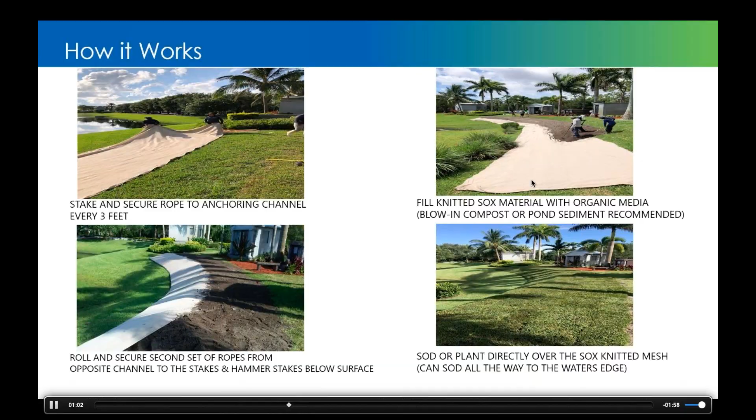As you can see in the photos, the resulting stability that SOX provides gives root systems and vegetation the ability to establish and take hold. The advantage of our systems is the speed of deployment and the complete stability for thriving vegetation, as well as water filtration, reducing nutrient loading in the adjacent water bodies.

Systems can be deployed in either a single layer yielding a specific grade or in a multi-tiered stacked array depending on the needs of the client. Our systems are filled with organic material, either dredged from the adjacent water body, hauled in from an outside source of earthen material, or blown in using a mulch or blowing compost truck.

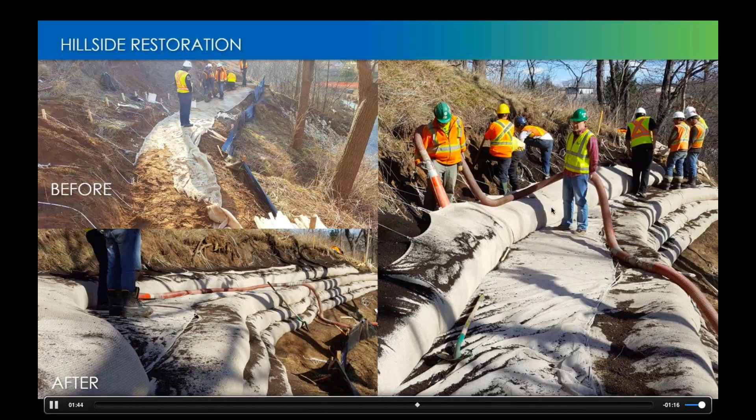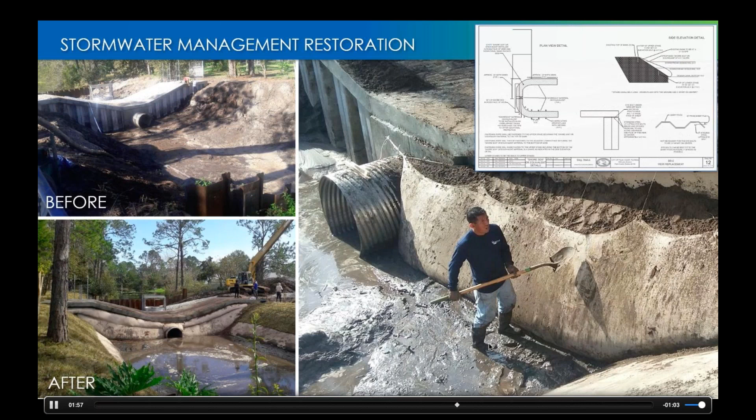We manufacture our systems in 6, 12, and 18-foot sections, but the modularity gives us a lot of flexibility for in-field modification. It is said that a picture tells 1,000 words, and I can stare at these and listen to their message for hours. Municipal, private, public, federal government, FEMA, individual homeowners, golf courses, HOAs, oil and gas, and energy are just a few examples of the client channels that we provide solutions to.

This series of photos shows the flexibility and durability of our system, going from a 4-1 grade to a shear wall to protect this large outflow culvert serving as the primary outflow for a 25-acre big box retail site in Augusta, Georgia. Mitigating sediment migration as well as improved water quality and mosquito control were the primary goals and achievements of this project.

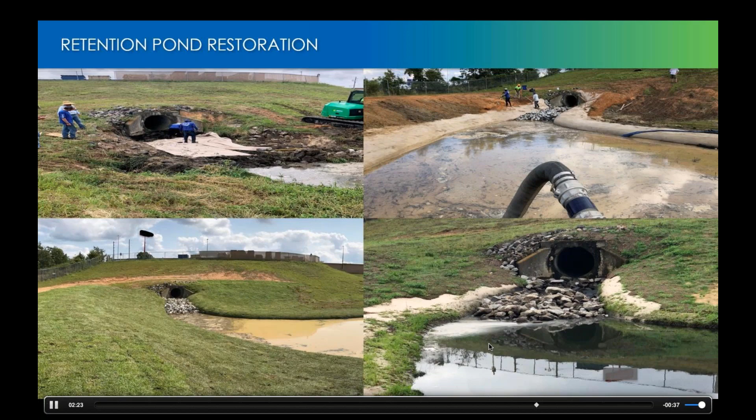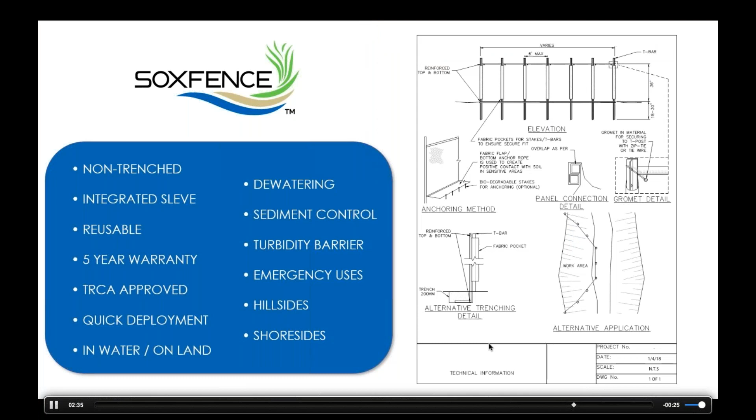SOX Fence is an ultra-high performing silt and sediment barrier currently being used by municipalities in California to mitigate the risks related to mud and landslides. Unlike other silt fencing, SOX fence is non-trenched and has a 5-year warranty.

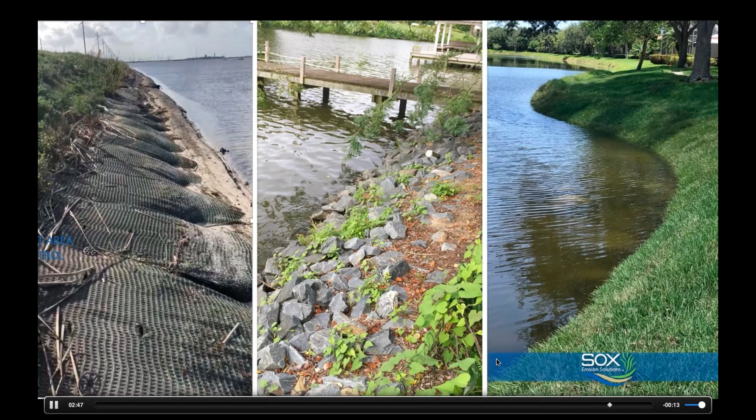All erosion control systems serve a purpose if they are properly spec'd, but as you can see on the right side of this slide, SOX is bioengineered, long-lasting, and meets all BMPs for living shoreline erosion control. Thank you so much for your time and attention and for caring about the stability of our environment.

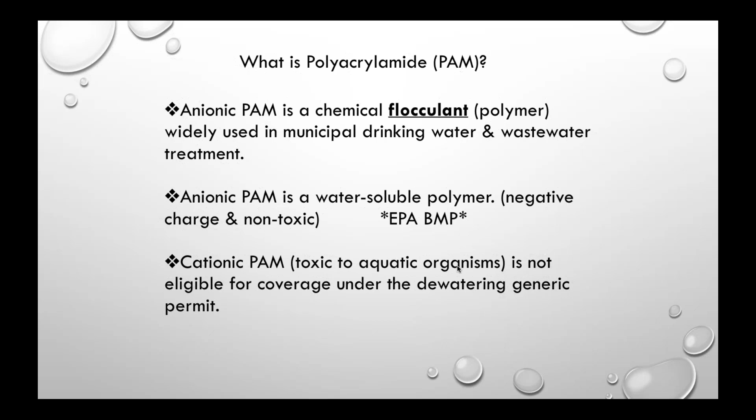As I mentioned at the start, our products are used to achieve two things: sediment control and water clarification. Our H30 granular line can be used in a variety of applications, including demucking sediment basins, under erosion control blankets or on wattles, for dust control, and especially as a superior tackifier. Our H30 liquid line also can be used for dust suppression and as a tackifier.

The Flock product suite is a suite of semi-hydrated anionic PAM blended forms used to clarify turbid runoff. When the runoff flows over the product, it starts to dissolve and begins the flocculation process within the water column. Over a short period of time, the sediment will start to drop out of the water column, allowing you to discharge clean water from your site.

There are two ways to treat the runoff with our products. The first is to actively pump the water over the products, and the second is to passively treat the water by staging the products in the concentrated flow. Next slide, please.

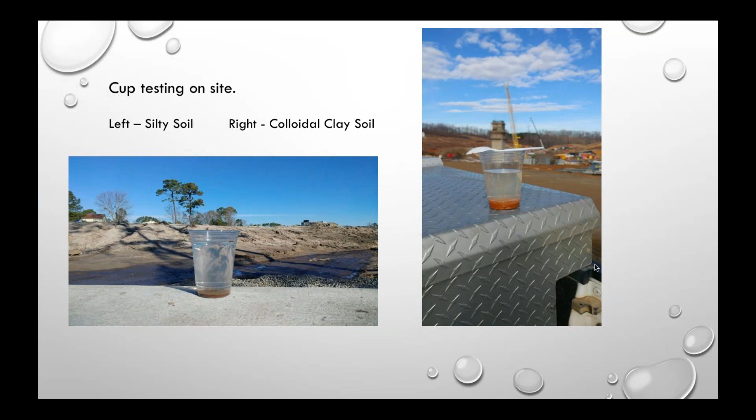We're an 800,000 square foot manufacturing space. We focus a lot on quality, making sure products are durable, withstanding the needs and environments they're placed in for each project. We've been manufacturing these materials, specifically our erosion control products, for over 30 years with over 40 million square yards of successfully installed products. We've been doing this a long time and have a lot of good experience, whether it's with the Army Corps or with other engineering firms, to work through the design process and installation of these materials.

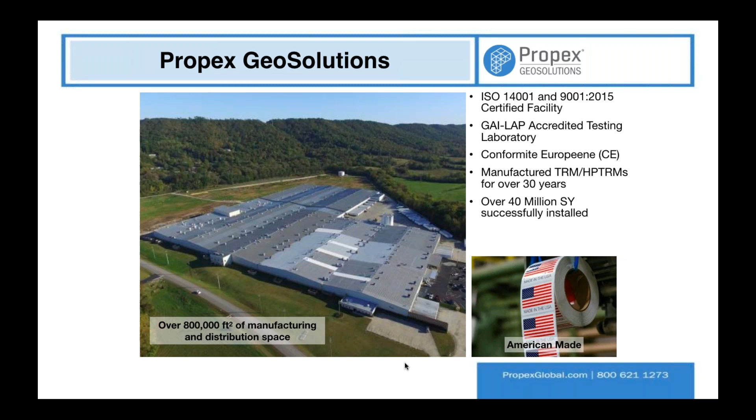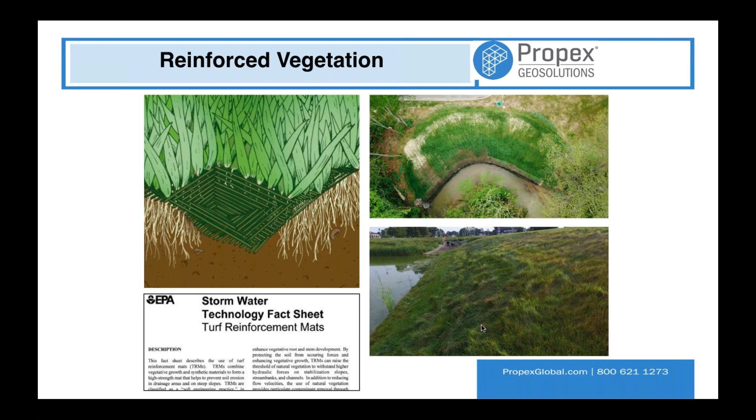Most everything we do from the erosion control side is focused on the idea of reinforced vegetation. Vegetation itself is a great best management practice, a great way to control erosion and improve water quality, but there's a hydraulic limitation of that vegetation by itself. So we look to reinforce that vegetation with turf reinforcement mats or high performance turf reinforcement mats to increase the hydraulic performance of the system as a whole. We've worked with the EPA in the past and established that these materials are best management practices in using vegetation in a higher capacity hydraulically, and also getting a large benefit from the environmental perspective as well. Next, please.

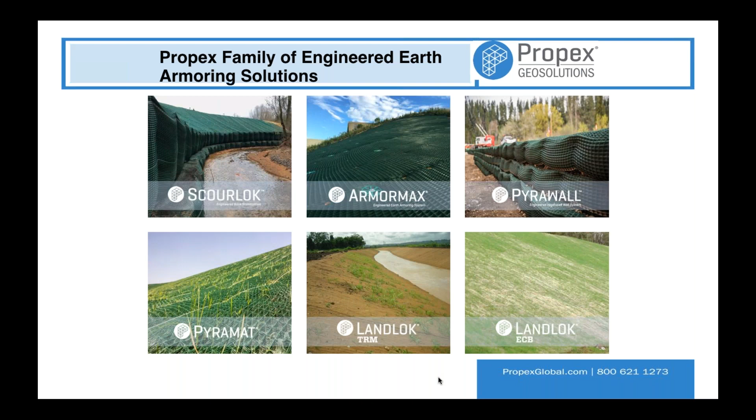As I mentioned, we are a manufacturer, but we very much focus on the engineering support portion of this. I'm an engineer myself. We have a team of engineers in our engineering services department, as well as engineers in our market development out in the field. What we try to do is provide that service to understand what the problem is for the project, work with the engineer, contractor, or owner to determine the best solution overall, whether it's partly Propex or partly other materials, a combined system. If you have any questions, we're here to support you, whether it's a geotechnical analysis, a hydraulic analysis, or just general support on installation. So thank you very much, and our contact info is there as well.

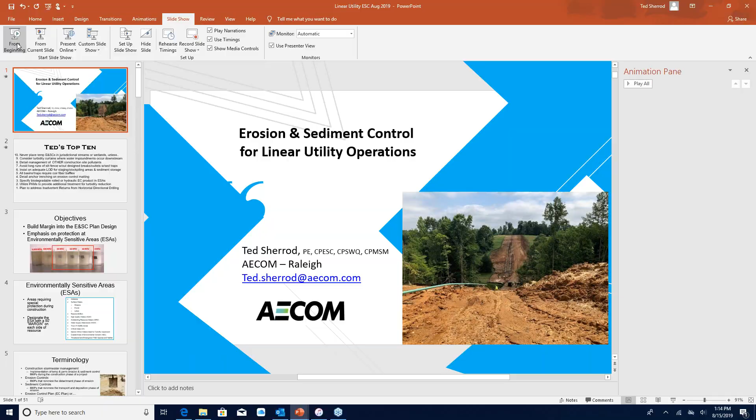Okay Ted, it should be all yours. Great, okay. Well, good afternoon, everyone. I'm Ted Sherrod, and we want to thank the sponsors today for presenting some information. I will specifically be reviewing some of the erosion and sediment control considerations for linear utility operations.

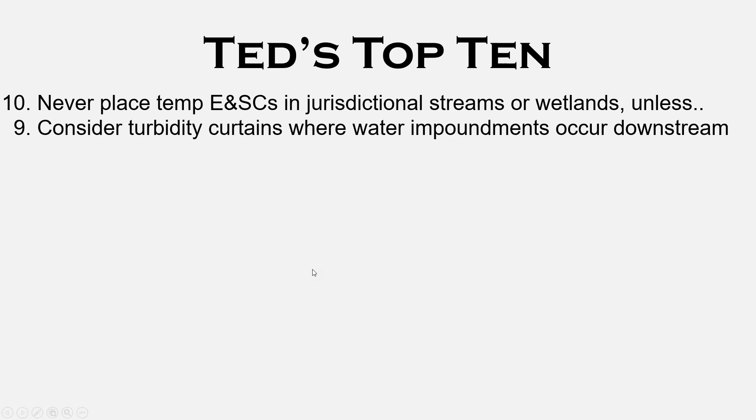I'd like to start with Ted's top 10 for you today when we talk about implementation. Stay out of those jurisdictional areas unless we're permitted to do so. How about turbidity curtains, where we have downstream water impoundments? Those are some additional components I'll touch on today in and around our linear utility jobs. Not only erosion and sediment control, but are we targeting those other construction site pollutants? How are we handling our concrete waste or other petroleum products on our job site and preserving water quality? Avoid these long runs of silt fence without designated outlets. We need those J hooks — I see a lot of that on our linear projects. How can we address appropriate control there?

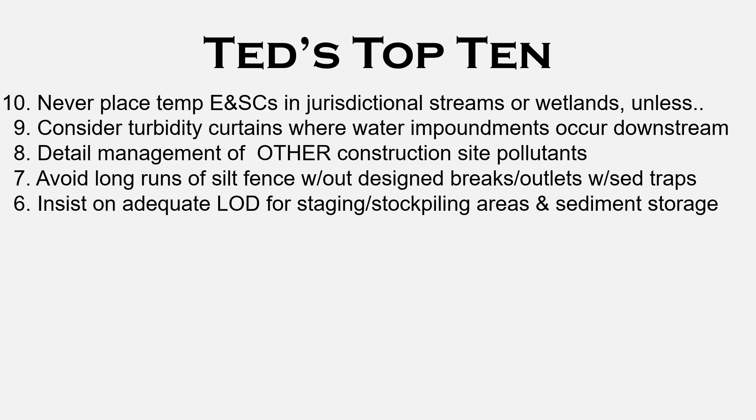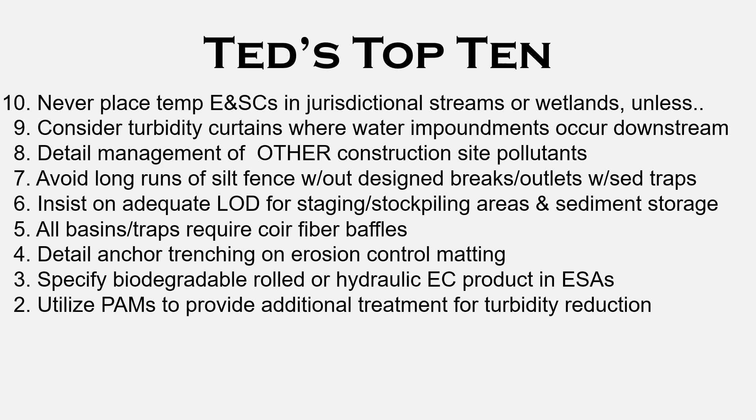Having adequate limits of disturbance, what I refer to as LOD, in our staging and stockpiling areas — that's another key. We need sediment storage on our projects for these linear sites. Generally we're so limited, but we need some type of traps or basins. I'll introduce some coir fiber baffles to you today as another enhancement to help us on those job sites. Let's get that matting in correctly with anchor trenching, getting it stapled and installed correctly, using our biodegradable products when we're adjacent to environmentally sensitive areas or other hydraulic erosion control products. And then, as one of the other speakers mentioned, using flocculants, or polyacrylamides, PAMs as I refer to them today, to help address turbidity reduction.

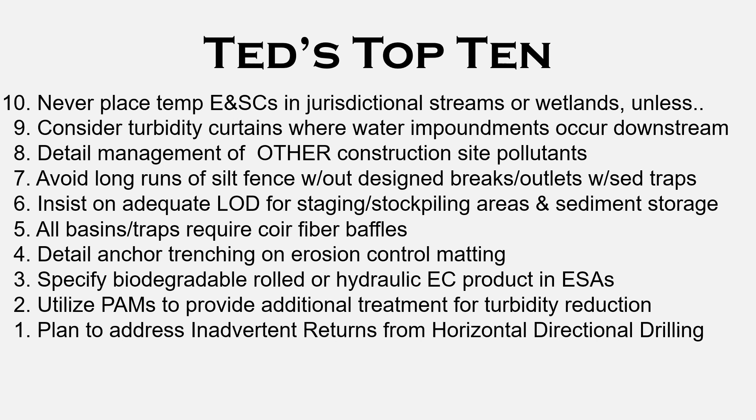And one of the components we use on a lot of our linear operations involves horizontal directional drilling. We'll touch on some key plans that we need to review to address those inadvertent returns that we see sometimes. How do we calibrate our objectives on our linear projects? Here I've given you some examples of water quality targets of 50 NTUs, nephelometric turbidity units, down to 10. So our target is really trying to address very pristine water as it discharges from our job.

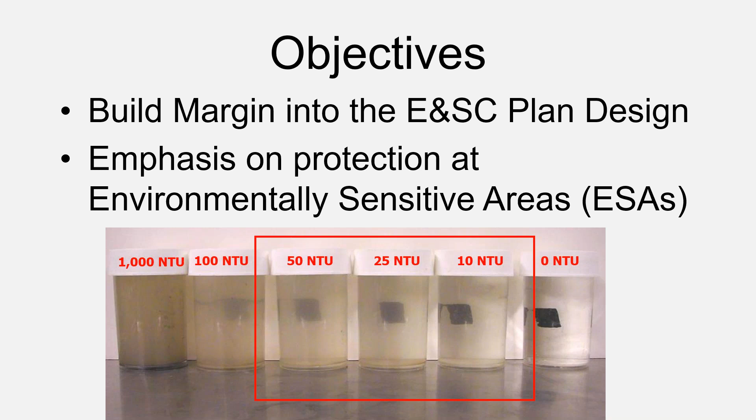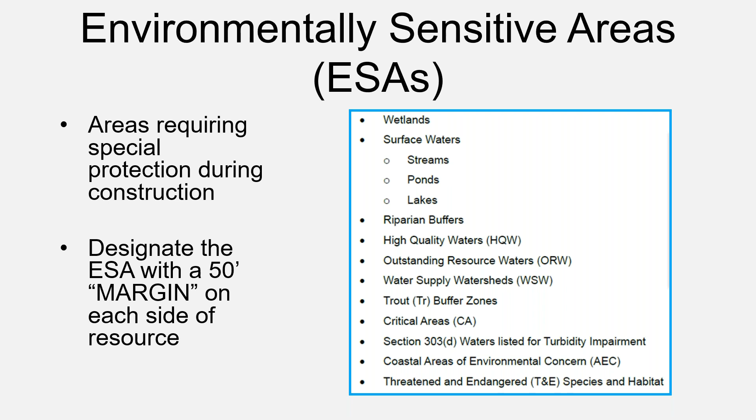I've made a recommendation here to get an additional 50-foot margin on either side of our resource to provide additional protection at these locations. I'll use a lot of terminology throughout our discussion today.

I'm focusing in on our construction stormwater management phase, which is that portion of the project where we're implementing our temporary and permanent controls. But I hear a lot of miscommunication from time to time as I move to different states.

We've really got a compound term here when we discuss erosion and sediment controls. Our erosion controls are those that address that detachment phase—our matting, our seeding, tarps, those type of things we're doing to minimize detachment. Then we've got our sediment controls. Those are in place to address that transport phase, or once sediment has been detached, to provide protection where we may see the deposition or provide an area for it to deposit in. Those are our sediment controls.

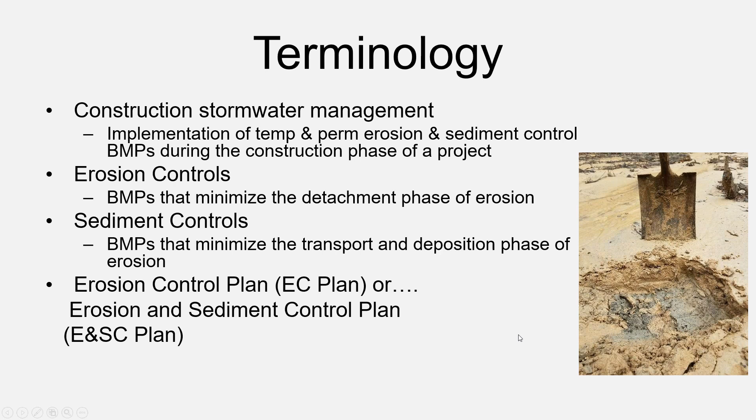So I hear a lot of discussion about an erosion control plan. Indeed, that's your seeding plan, but generally we're talking about an erosion and sediment control comprehensive plan for our erosion and sediment control needs on our linear jobs.

What are some of the concerns you see on this particular site? Some jobs I've been on recently, contractors operated outside of the LOD, outside our limit of disturbance. Our perimeter measures have not been effective in and around these wetlands and stream areas. And although the plan may show measures, we just don't have sufficient BMPs in place to control sediment on these long linear utility type operations.

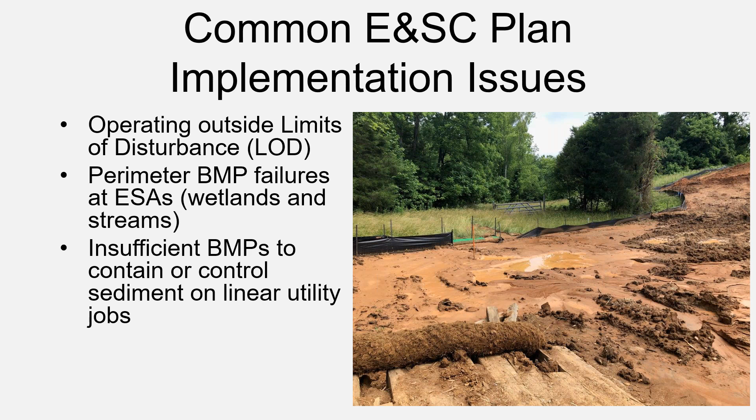So what are some considerations we can look at in the design phase, or throughout the entire job? I'd like to start with the design phase. If you're a designer tuning in today, we've got some non-structural BMPs we can include in our construction narrative, in our plan set, that we can address.

I'm focusing now on the clearing and grubbing phase. How about limiting the contractor to only clearing areas and not grubbing until he's ready to pursue grading or initiate work on trench, whether it's underground or above ground construction, and having those BMPs implemented right after clearing or concurrent with the clearing and grubbing operation? Is that included in your narrative?

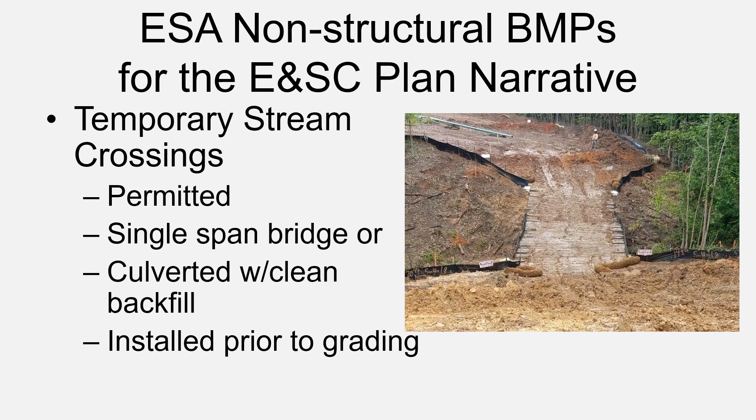I hope so. How about other non-structural BMPs we can include in our narratives at our temporary stream crossings, where these are permitted areas? We've got span bridges or culverted installations where we'll be crossing these locations like you see here in the photograph, in place prior to our grading operations. All these sensitive areas require additional protection.

How about other non-structural BMPs—just narrative we can include in our grading phase? Once grading begins, progress in a continuous manner until that section is completed and stabilized. Work in sections. So often I see our contractors open up too much erodible area that they cannot manage sufficiently. We see the potential for off-site sediment.

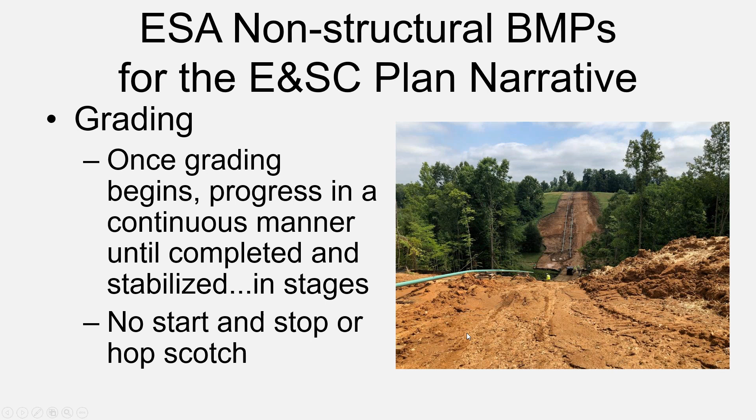We don't like this starting and stopping and hopscotching around a job, but we can include in our contract language that the contractor must address stages in his construction and complete the job section by section.

Again, other non-structural components we can include in the narrative include staged seeding as the contractor brings his cuts down or his fills up. Once he reaches maybe 10 foot in height on some of these fill areas, he can go in and start stabilizing areas, or use a trigger for exposure—if he's opened up an acre or more, be sure we've got some temporary cover in place.

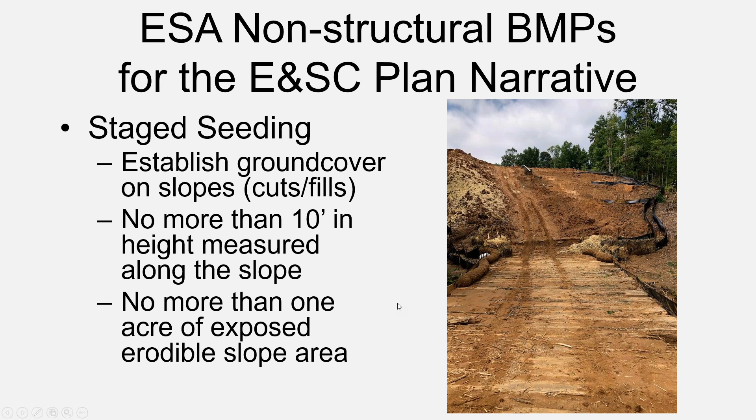So a lot of these items can be added to our construction narrative as non-structural measures. We can emphasize stabilization not only by stages, but permanent revegetation, getting that in place immediately following final grade on all these highly erodible slopes and conveyances on our linear jobs. We can also mention incorporating all of these components in phases throughout our projects.

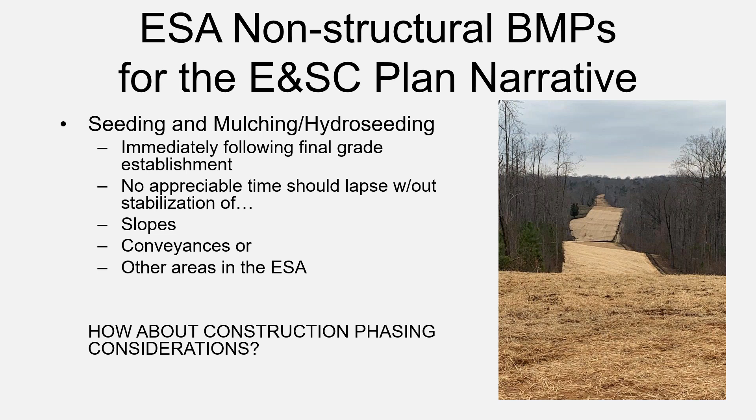So not only addressing erosion control plan narrative components, we can really address these during phasing to manage how we handle access roads. That's always a challenge on our sites for a linear job—we've got to access them from a location, in many cases several hundred feet or lengthy distances, so we've got to have protection in and around these access roads.

From a designer standpoint, oftentimes I see us giving an inadequate area or footprint for a contractor to work in. So we need to provide adequate limits of disturbance so the contractor can access these areas.

How about during that clearing and grubbing phase, have all of these environmentally sensitive areas flagged out, either with highly visible flagging or fencing. I've seen different state jurisdictions require different components. Some use none, but if we're going to provide some additional protection, we need to be able to identify them.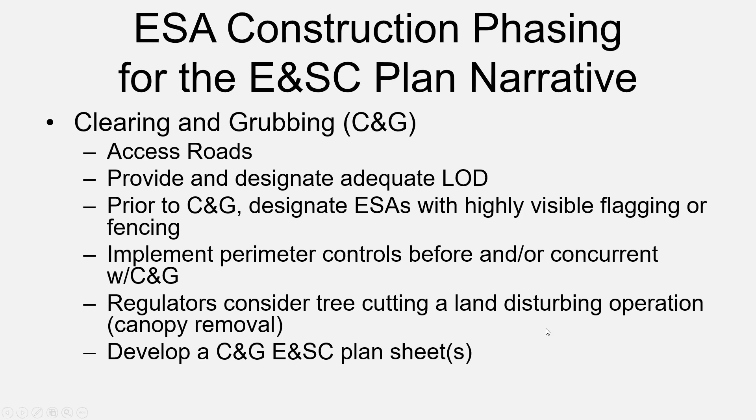Again, many regulators consider once that tree canopy goes down a land disturbing operation, so we've got to have our measures in place. And many states require clearing and grubbing erosion and sediment control plans for linear operations just to address that initial clearing and grubbing phase.

Once we implement our grading operations, once we get ready to open up those access areas or along the main line to initiate our trenching operations, or if we've got electrical utility structures going in place, we've got intermediate measures that we want to get in place. We can't just leave the perimeter measures there to provide all of our protection.

And I'm emphasizing here a need to get those erodible areas stabilized quickly. In many cases, engineers will include a more aggressive time frame of 7 days instead of the EPA norm of 14 days for stabilization in and around these environmentally sensitive areas.

Also, I've found that it helps our contractors to call out detailed narratives and details where we're doing dewatering in and around these environmentally sensitive areas, or if we have temporary culvert work. So call that out on your plans, and include some narrative for the contractor to be able to address.

And a common problem area, stockpile management. Have those stockpiles walked in, tracked in, knuckled in with the bucket such that we can get some temporary ground cover in place and have the perimeter protection there. We get into a lot of trouble where we don't manage our stockpiles in and around a project effectively.

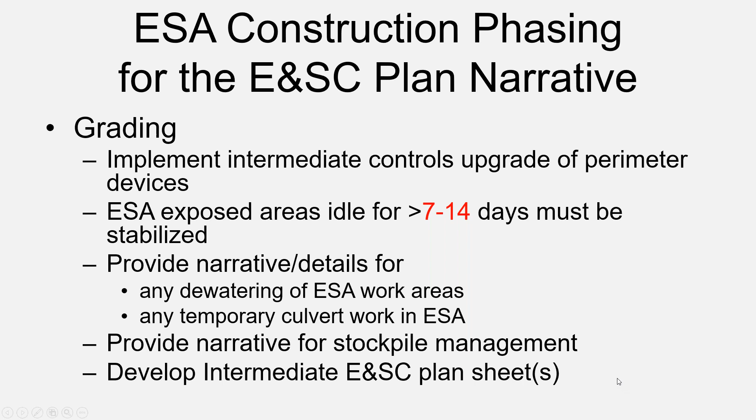And a number of designers require intermediate erosion and sediment control plan sheets to address that intermediate phase on some of our projects. So as we go into the final grade of our jobs, once we're addressing our final stabilization...

I've seen a need to address demo-type narrative for how the contractor will demobilize from a large sediment storage that we may be prepared, how that will be removed, how it will be returned, giving the contractor some direction on how to address that.

And in some cases, post-construction structural measures will be included on some of our projects where maybe municipalities require the same. So one of my big concerns is I see a lot of temporary BMPs

remaining in place once we've already got that good 70 to 80% permanent vegetation. Your state may require a different value depending on your location in the U.S. But I like to see the temporary BMPs removed, indeed there for a temporary purpose for a limited time, and let our permanent BMPs, our permanent turf, serve as our primary vegetative component.

So just some considerations for you, discussing that erosion and sediment control phasing tips.

Many jurisdictions require a notification to the regulator, inviting them to the pre-construction conference. Often I see these cut and paste narrative info that's used by designers. So try to avoid that, where the same thing that you included on the last job is included on this job, but they all have their specific characteristics that you need to address.

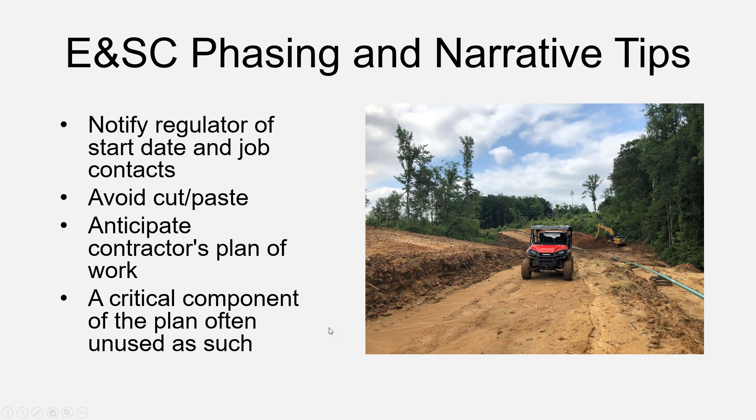And do, as a designer, if you are in that role, anticipate the contractor's plan of action so you can include your narrative to address that component. Again, the narrative is so important, but many times I see it's just a checkbox that we've included. So let's address that in our implementation for our plan development.

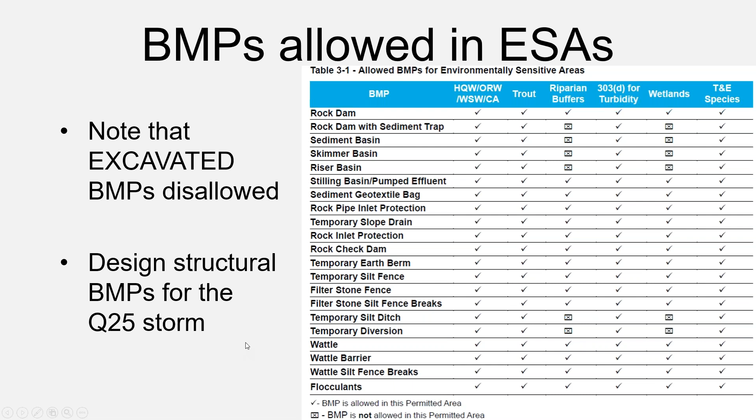So we have to limit our sediment storage, and sediment storage has to take place outside that environmentally sensitive area boundary. Perhaps we need a more robust design for our structural BMPs in and around and adjacent to these environmentally sensitive areas. So that's my point, kind of looking at wetland design tips.

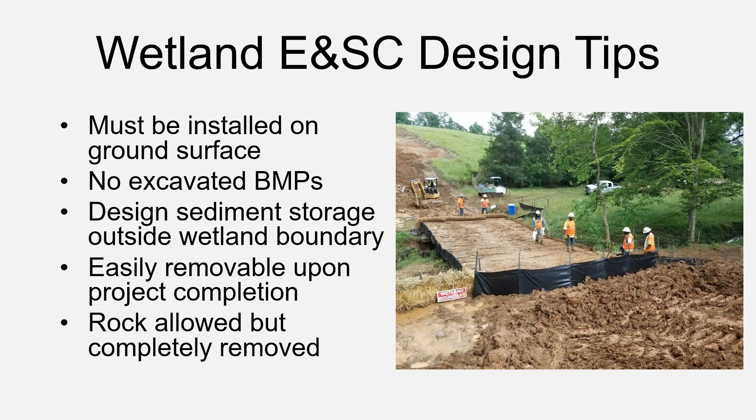Again, installing these on perimeter areas, kind of surface related measures, no excavation, and provide some type of sediment storage outside that protected boundary so we can capture the sediment before it reaches the resource. And we know we've got to remove these. So again, any kind of stone or riprap has to be completely removed from the jurisdictional area.

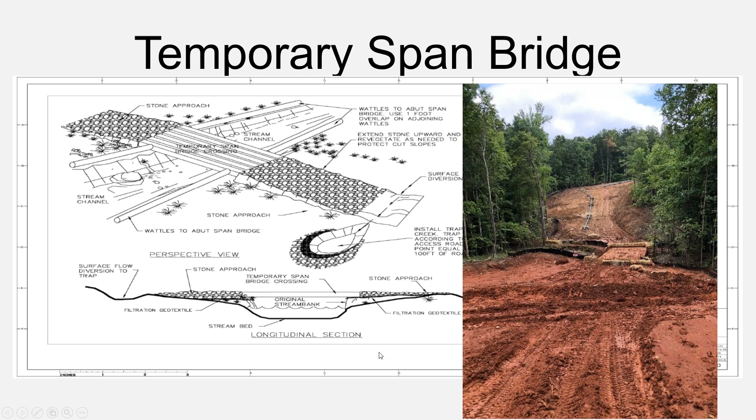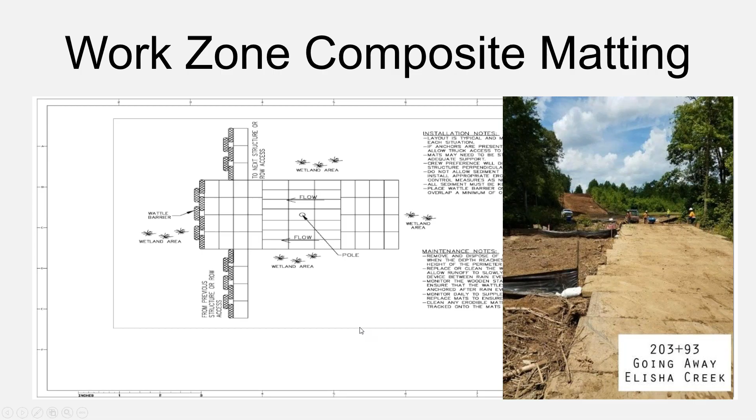Here you see one of the shots of an area that's really too much exposure with limited measures? Contractor got a little too far ahead of himself where he had a span bridge, as you can see in the photo on the right. But again, another BMP that we use in and around our linear sites when we're trying to traverse these environmentally sensitive areas. A number of jurisdictions require composite mats on job sites around utility structures, in and around wetland areas, stream crossings. So again, plan ahead, have those details available so they can minimize disturbance as they address treatment on these ESAs.

So again, we've got a lot of technology at our availability that we can use on our projects. I know some states that may be listening have concerns. The regulators don't allow flocculants on job sites, but we've got a lot of opportunities where we're working in and around these high quality waters to provide a higher design standard, provide additional buffers. And that was my point. If we're dealing around these impaired waters, let's do over and beyond to provide that protection.

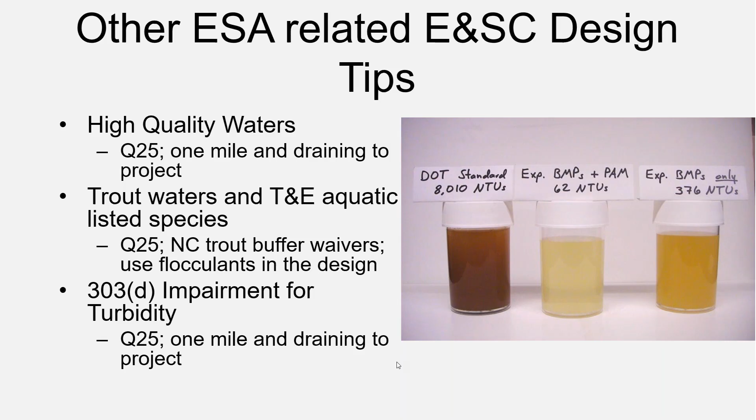So the way I look at it, once we get our design, we've got it in hand, we've got our project superintendents on the call today, our foreman on the call, our BMP installers here as well. Here is my way of looking at our implementation and maintenance type principles that we need to be concerned about.

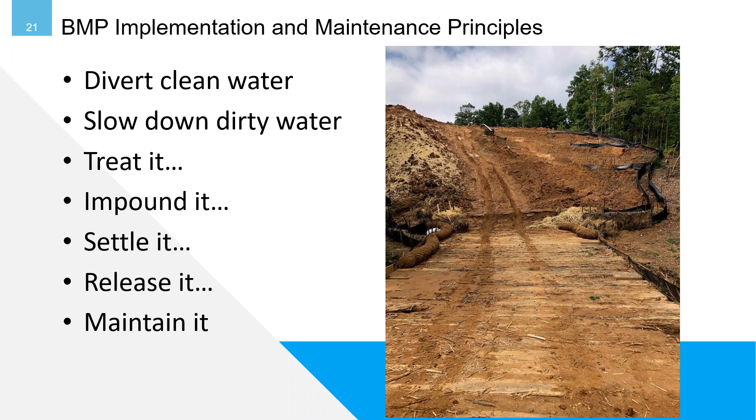If we can divert clean water off these linear projects, we've minimized our risk. What I mean by diverting clean water, in many cases we've got pasture areas and ag fields routed right across that would drain on our areas. Let's turn that and divert that water away, slow down that dirty turbid water that we're capturing on our job site, like we see in the photo here, treat it with some type of BMP, impound it, slow it down, settle it, then release it and maintain it. So these are kind of Ted's tips on how our plan should be executed on the job site.

I'm not a hay bale fan. Some of you may disagree, some of my coworkers in the Western US have indicated there are still hay bales used from time to time, but we've just got such superior measures in our toolbox now to use in lieu of hay bales. So let's get together as an industry and use some of these superior BMPs, and hay bales are probably best used broken up, used as mulch, for example.

Really one of the tools of our trade under linear utility operations are slope breakers or water bars, you may call them diversions, such that we can control that surface water runoff and direct it to an outlet. But in this particular case, it's not intended to direct it to a silt fence. We've really got an opportunity here for undermining or overtopping, but outlet it to some type of sediment control measure that I'll give you some tips on here as we go through more. Don't track it like you see this one here that would promote acceleration of erosion. It should be tracked in the opposite direction.

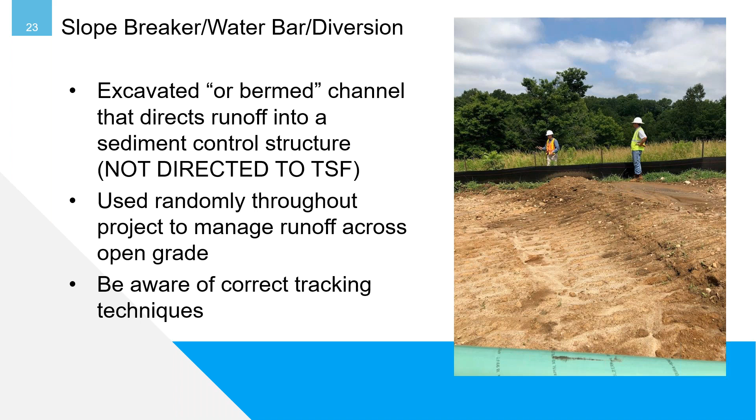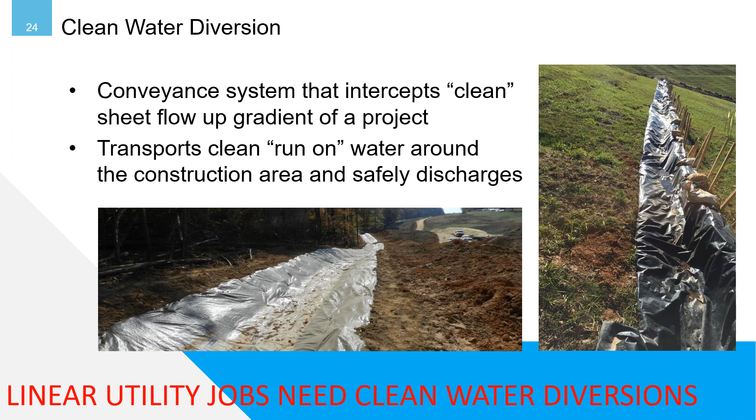So my point about clean water diversions, I think all utility linear type jobs should utilize clean water diversions. You can see the example I've got here of intercepting that water coming from the shot on the left out of the wood line. Instead of running that across my linear run, I'm trapping it in a geotextile lined ditch, routing it down to the stream, safely conveying it around so I don't have to deal with it on my job. Other options are shown on your right. But I give you a detail here, just gives an illustration. What would be excavated from that conveyance is bermed, seeded, stabilized, and then some type of geotextile or poly type material used as a liner to convey clean water, keep it clean, and send it to a suitable outlet. I'll just give you some examples.

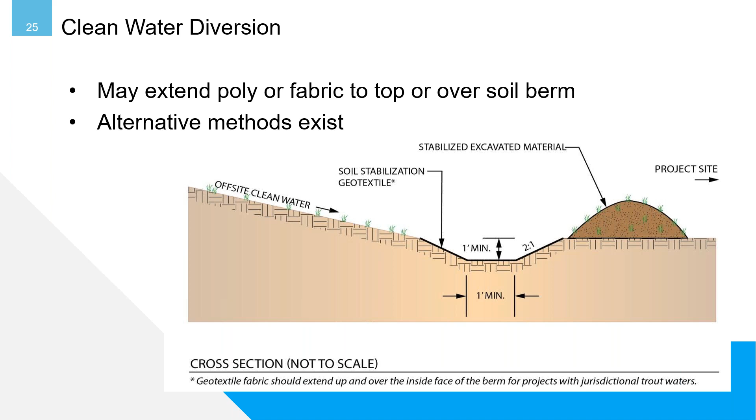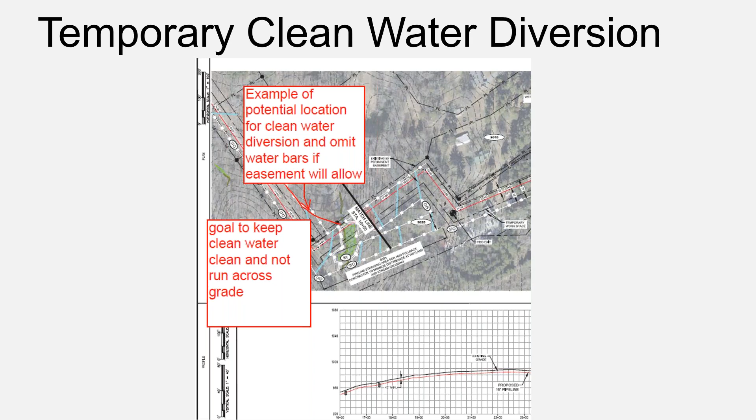Here's a screenshot from a linear job where we have a lot of adjacent run-on water. I've indicated here an example of where we could use a clean water diversion to keep that off of our grade and just route it to its location where it generally flows along the stream path, keeping that clean water clean. Other types of measures I've seen to manage water on a job site.

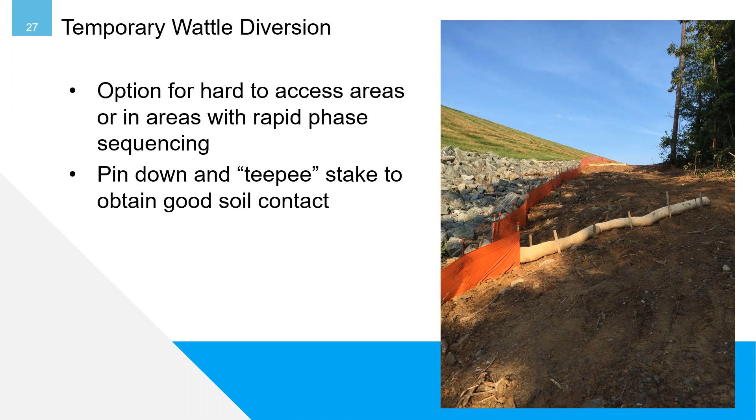Now we're working at managing construction site runoff, but I've used some wattle diversions. There's an example where I had a little access road adjacent to an existing stone line, ditch line. I was able to use some J-hooks from a wattle standpoint and route a relatively steep area to a suitable outlet, being sure that wattle was pinned down well. Metal stakes that we use are metal staples, as well as anchoring teepee staking that you see here.

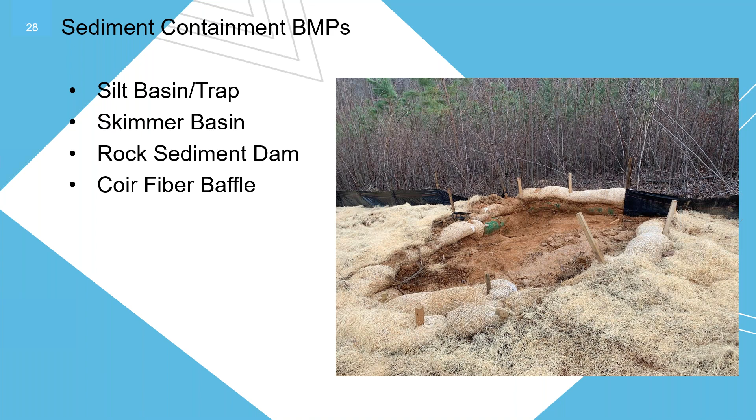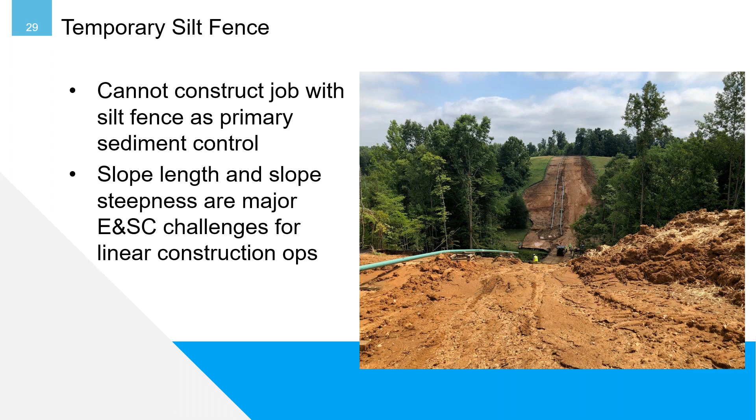I've really been emphasizing the need for sediment containment on our linear jobs. I know we've got limited footprint, minimal area to work in, but I'd like to ask you to look at what we can do to improve protection at these discharge points. We can't build a job with silt fence alone. There are additional protective measures needed dealing with all these long, lengthy slopes and steep slopes. It creates great challenges, so we've got to have a real suite of measures in our toolbox to address control.

And we end up with this kind of scenario. You see in the foreground, this is a timber mat crossing at a stream location, but I'm right at the approach, trying to control the job with all silt fence, a little wattle here and there, and it just doesn't get it done. I'm asking for you to suggest another BMP, because we've got to have a way to slow it down, pond it, settle it before we release it, and this doesn't get it done.

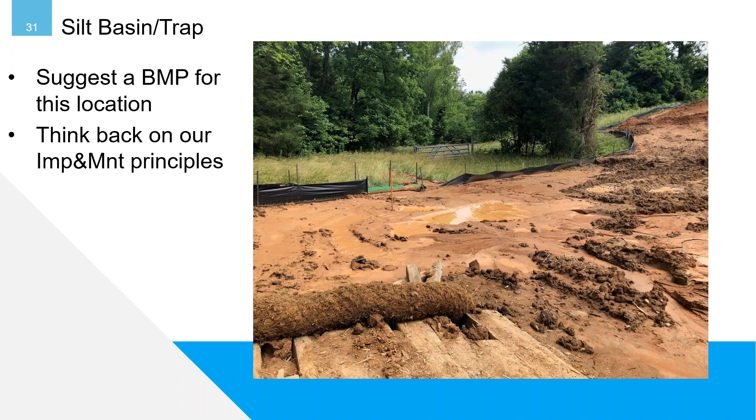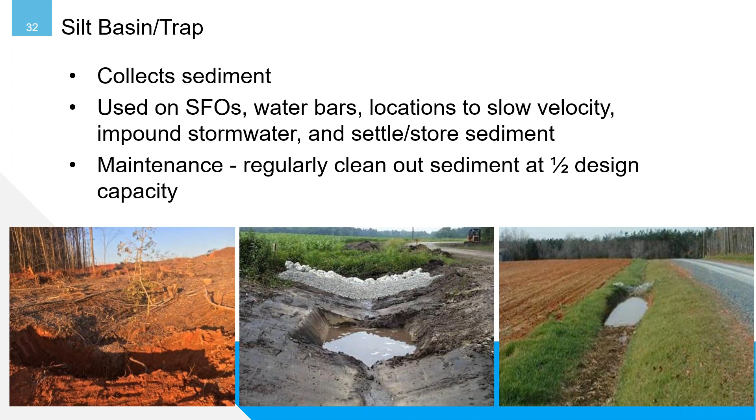So how about some type of sediment storage, just a small trap, a small sump, a small basin to collect sediment. Example here, I'm showing along some of our access roads where we've got little small sumps in place to help us store that sediment on our job site.

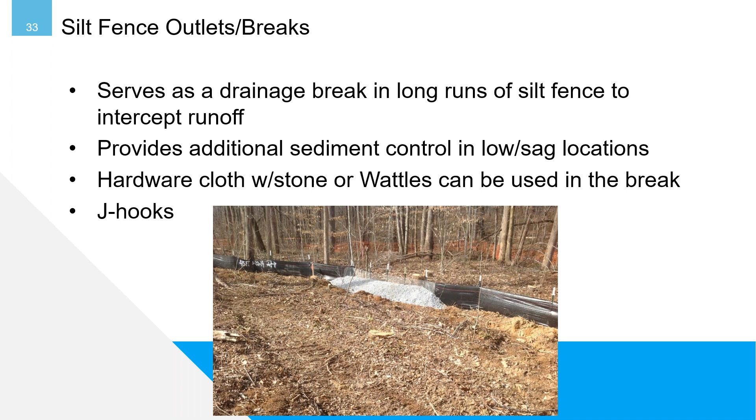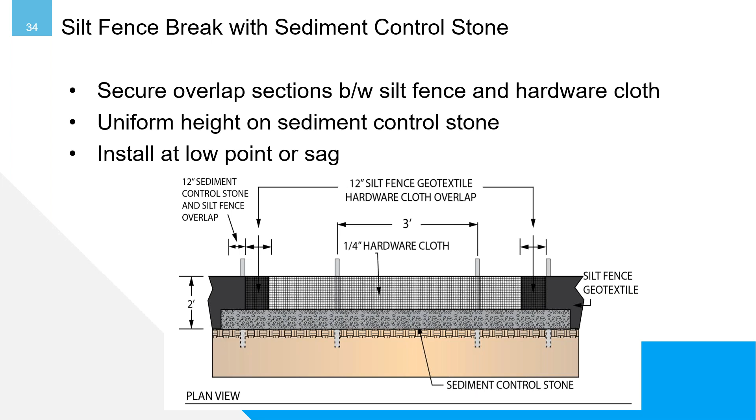Have somewhere to discharge where, at least if we're using our silt fence, have some type of silt fence break or silt fence outlet. Example I'm using here is in a low point where it will discharge. We don't have an opportunity for a lot of stone on a lot of these linear jobs, so we'll select other products such as natural fiber wattles, for example. But these are some examples where we can provide some impoundment, settling, and treatment of the stormwater and allow it to be slowly released. Just a little detailed shot of the photo I was showing.

So again, if you don't have the opportunity to use aggregate, we've got the fiber rolls we can use. We can double stack these vertically at some of our outlets, at water bars, slope breakers, silt pits, turnouts, and provide a little sediment storage.

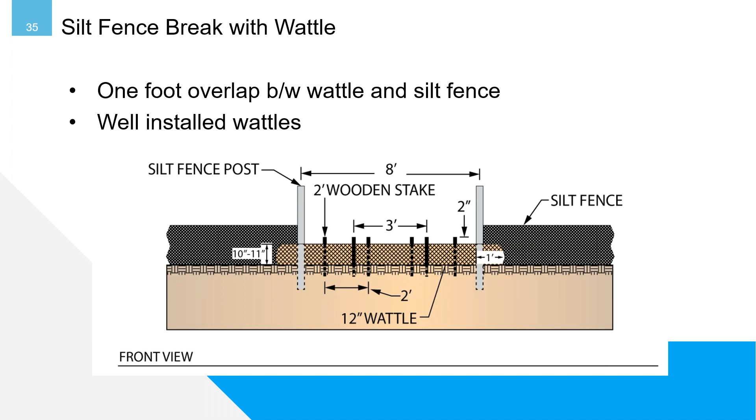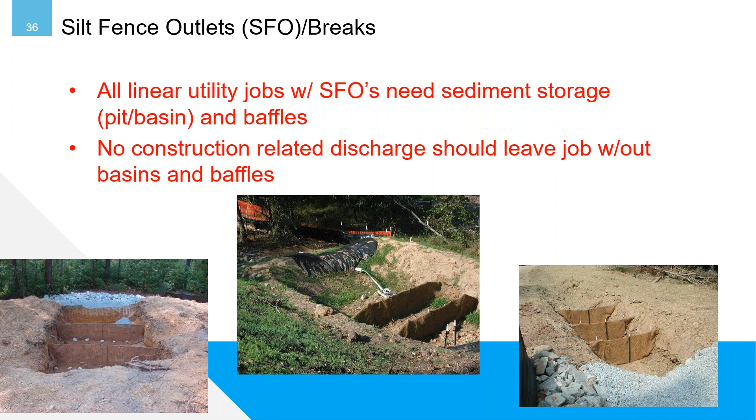But I also want to challenge you, if we are outletting our stormwater at these breaks and silt fence outlets, we can provide some additional protection to minimize our risk of sediment loss with some of the coir fiber baffles, and that's what I'm showing. I'm emphasizing sediment storage and baffles. So these are the coir fiber products that are used to intercept that flow.

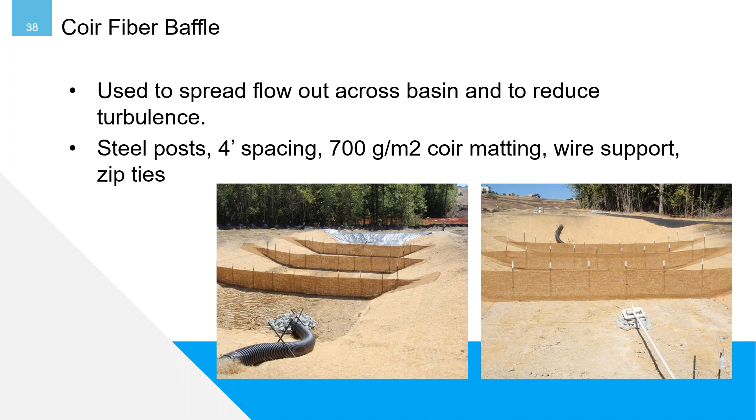Some other shots that you see used, they can work in small footprint areas. They really take the energy out of the water. They slow that flow, they trap the sediment, and they give you additional protection. So this is just another view of the steel post, the spacing, the type of matting product, the wire supports that it rests on, in another basin type application on a very large project. Coir fiber baffles, in addition to our regular silt fence outlets with some type of sediment pit, trap, or basin is critical. So I'm introducing here opportunities at our slope breakers where we can come in.

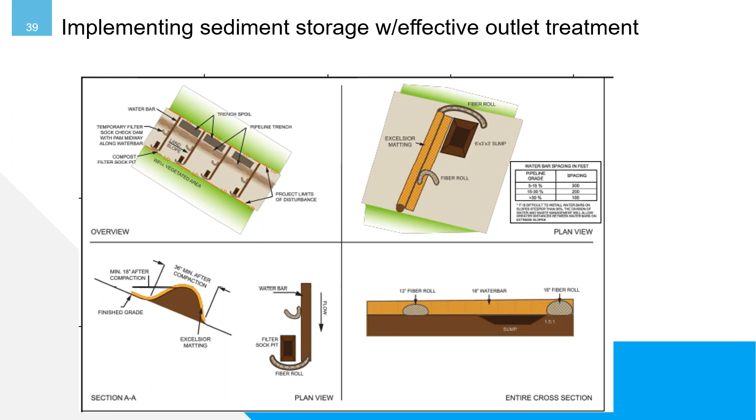The shot on your upper right shows a scenario where we could mat our slope break, drop in a wattle to check the flow, maybe introduce some polyacrylamide at that location, and allow a sump treatment before it outlets through a fiber roll, for example, at a location. So we provide treatment, we minimize velocity, we introduce flocculant, we have sediment storage, and we have protection at the release point.

I've gotten a lot of complaints on projects in recent months, especially last year, about adjacent water resources, farm ponds adjacent to these linear projects. We know they travel over the landscape through ag areas, industrial areas, commercial areas. I've included some tips here on what we've done to add polymer on water bars, adding additional storage at our outlet points, addressing Excelsior over some of our rock measures, adding flocculants, trying to get some immediate ground cover in place, addressing matting, and trying to obtain additional limit of disturbance area to get some sediment storage in place.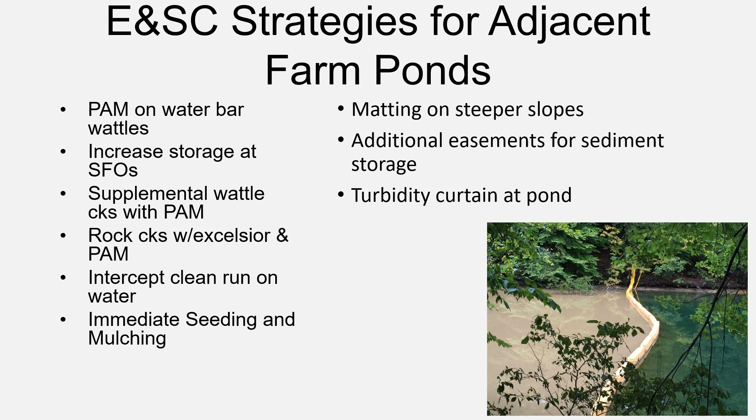As you see at the bottom, we used this turbidity curtain where we knew we had some really high risk locations. You can see the portion on the left after an extreme 2-inch thunderstorm, and we were able to provide some protection at this water body, at this pond.

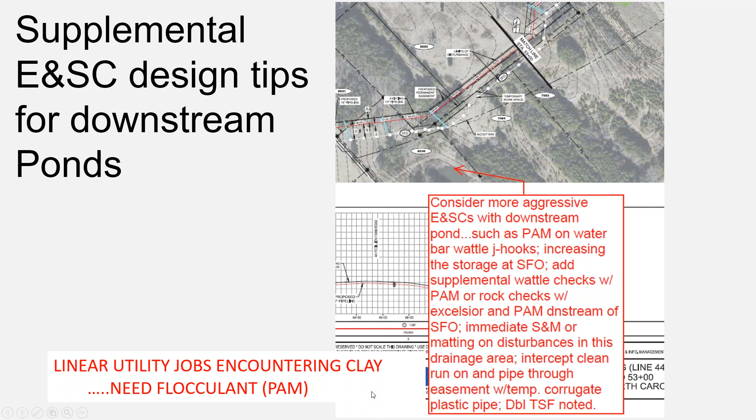Just a screenshot showing you a pond here in the upper shot. We've got one little silt fence outlet, looking for some more robust treatment to use at a location on a long linear project here to provide some protection for our downstream water bodies. So if we're dealing with a lot of colloidal clays, we can't depend on conventional BMPs. We need some additional technology.

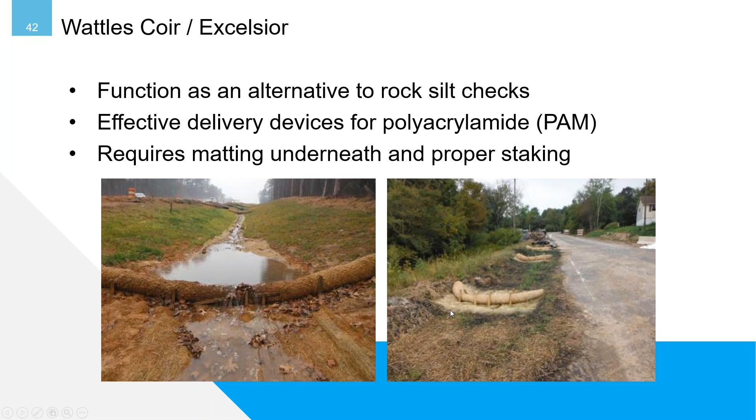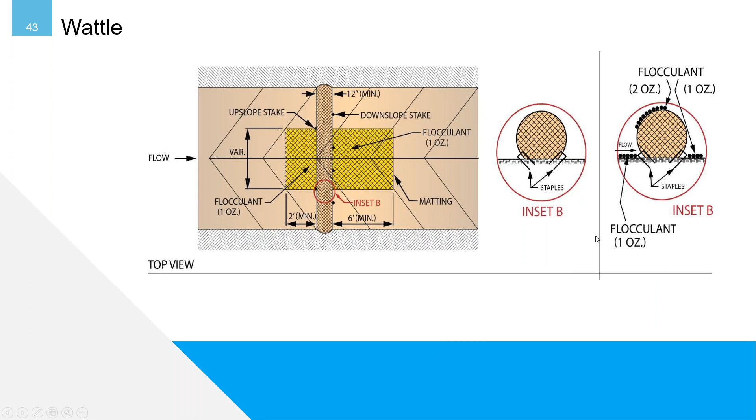That's my point - wattles have served a good purpose, whether they're the coir or the Excelsior materials, with proper staking, proper treatment, proper installation. This shot shows an installation where they're being stapled, being staked, and we're also introducing the flocculant to these, giving you a detail for that.

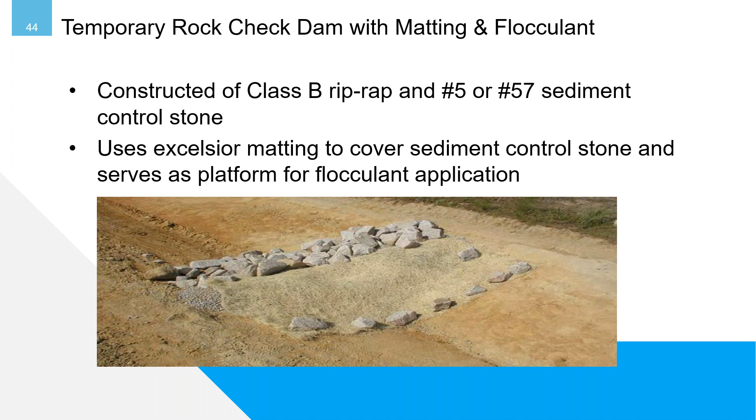In mountain terrain where it's hard to anchor a wattle, for example, still use a stone structural measure, wrap it with a matting material like you see in Excelsior here, and then apply flocculant at that location to get the same results as the earlier shot I was showing you, where we could reduce our construction site runoff water quality values to much more beneficial levels.

We've got to have good protection, good perimeter protection, and having a written inadvertent return plan for our HDD operations is critical. I've reviewed a number of those - they always address how a contractor will respond to provide containment where these drilling fluids may manifest at locations we didn't anticipate, how the contractor will recover it, like having materials stockpiled on site in inventory so he can address containment, and then already having a recovery and restoration plan for how he'll remove and/or address stabilization, returning these sensitive areas back to their original condition.

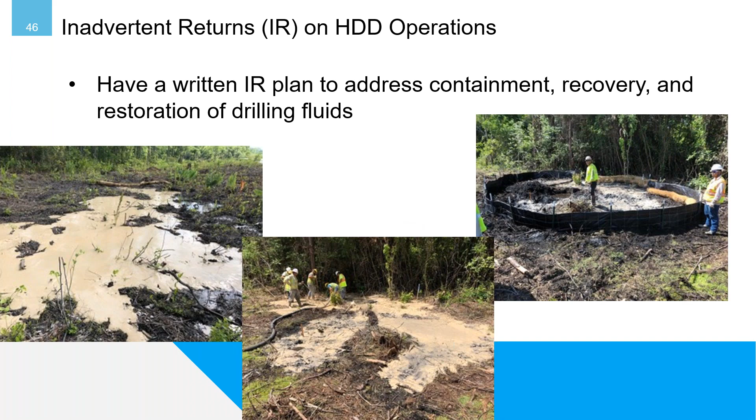So I've talked a lot today about various erosion and sediment control treatments we could utilize, but we know rapid vegetation establishment is so critical. I had a job that was open for multiple miles with limited temporary seeding - they faced challenges the whole job. The next section of project immediately implemented temporary ground cover, and it helped them so much. We know that's a component of our permit requirement, to get that early ground cover.

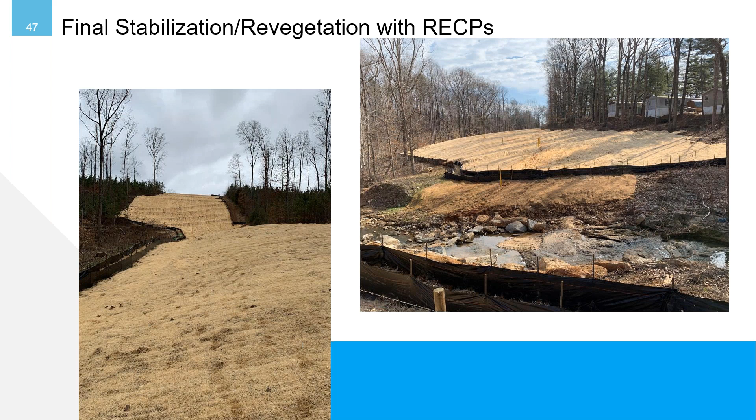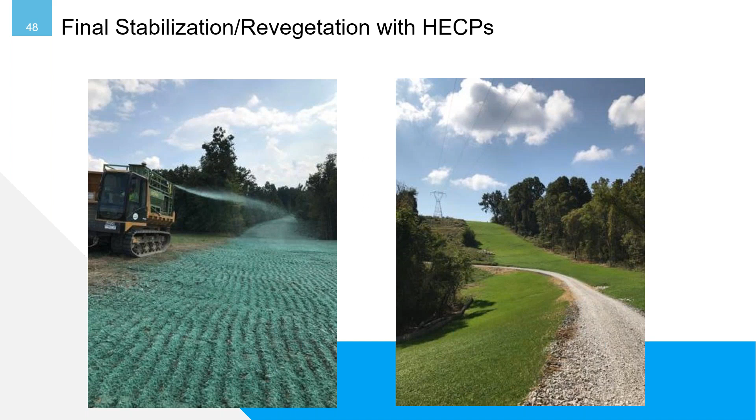So really enjoyed the discussion with you today.

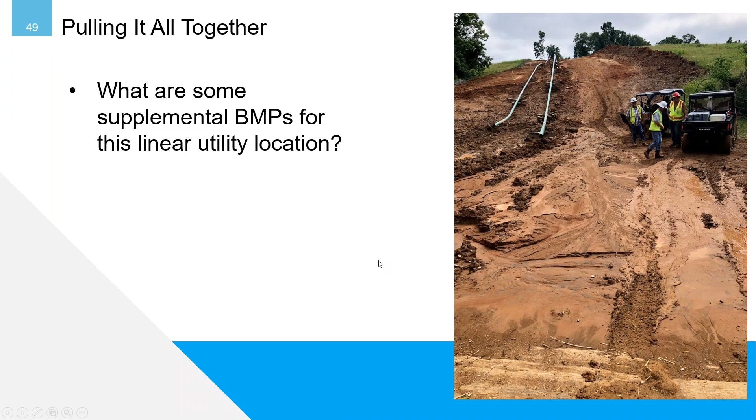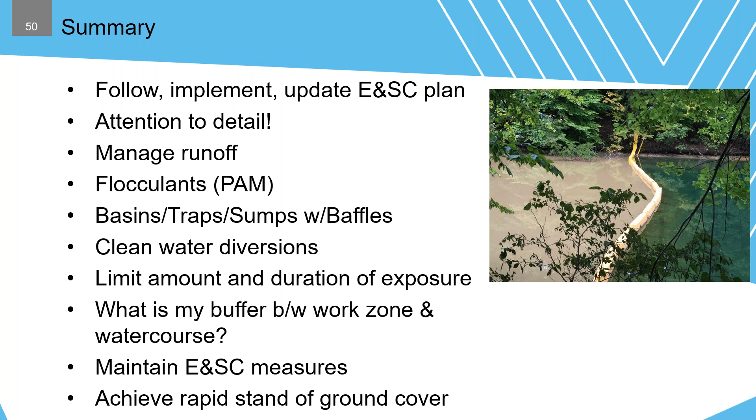I'd like to conclude by emphasizing the importance of following, implementing, and updating your plan. Attention to detail, build it right the first time, manage the runoff. If you've got flocculants you can use, consider that as well. Have some way to store the sediment on the job. Don't depend on a single measure. Use clean water diversions, keep the clean water clean, and limit the amount of exposure. Ask yourself, what is your buffer between your work zone and your water course? If you've got an adequate buffer in place, outstanding. Maintain those measures and get that vegetation in place. So hope I've offered some tips for you, and I'll turn it back over to Beth.